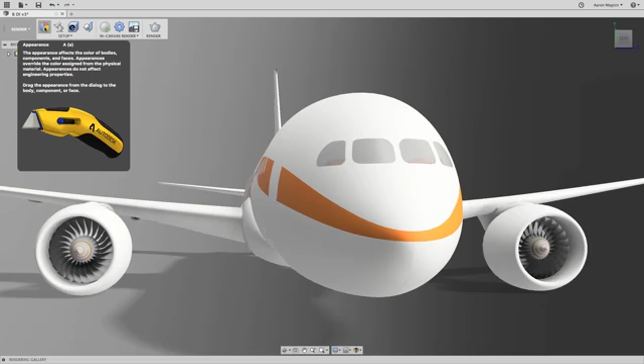So let's go. The first thing you want to do is apply appearances. This includes those materials, finishes, textures, and the like. Hopefully you've already done most or all of this in the modeling environment.

This makes working there much more pleasant, but will also help us skip this step when it comes to rendering. Next up, and where we'll focus most of these efforts, is in the scene settings. Right off the bat, the first thing I want to do here is make it appear that this model is really flying and hasn't just finished a belly landing. So let's lose the ground plane.

After that, I want it to look like it's in clear blue skies. This environment background setting is not doing the trick. We'll change to the environment library tab to see if there's anything else that might work better. We can try different things here like dry lake bed, skylight, and we can even download or add custom environments suitable for this majestic craft.

But for a quick turnaround, I might just use a solid color. And while white is clean, let's see if we can find a nice blue, maybe a grayish blue. Some of you might know an RGB value that aligns to your brand too, so we can always type this in for precision. What we have works pretty well, and the model no longer blends in with the white background we previously had, so that's a win.

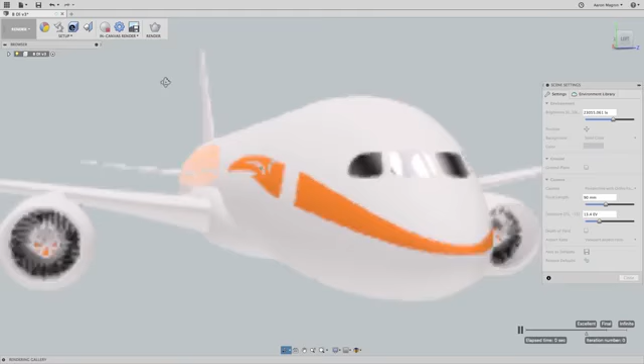As we get closer to something acceptable, we'll start to use our in-canvas rendering tool to get better insight on the changes we're making. As we adjust views or change settings, this will give a clearer indication of what the final rendering might look like.

Note that in the corner you can see the status of the rendering process. And what I also want you to note is that it's going to stop when it reaches excellent quality. This is an in-canvas setting, but it can be set to resume to final quality or to infinitely render if that floats your boat. Just click and drag the small arrow on the bottom to the setting you want.

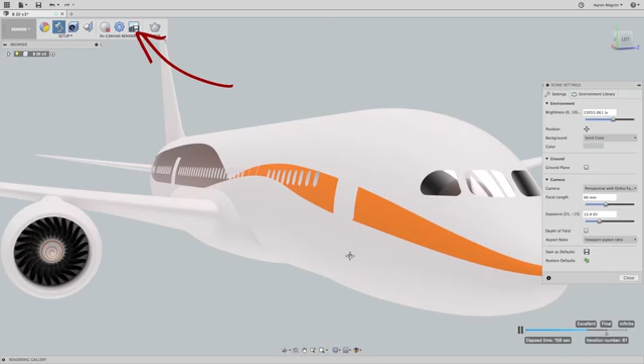If your in-canvas rendering reaches a quality fit for marketing, make sure to save it out using this button. But please beware that any mouse movement causing view changes will wipe all of the hard work and computation time.

This is something we can overcome, however, with the addition of the ability to lock the view found in the in-canvas settings. With that on and while rendering, if I try to change views, I'll get told this. In short, it says no can do.

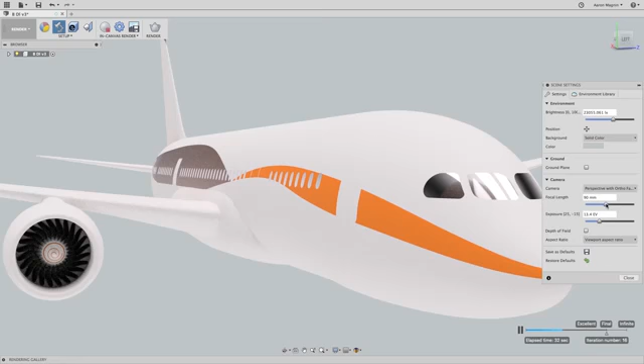Anyway, we'll turn that off and look into a couple more settings that I often use. Focal length is one of those. This emphasizes or minimizes the effects of the perspective view. So it goes from an orthographic to something you might expect with a fisheye lens.

Of course, like most things rendering, this is up to you to determine what's best. Finally, depth of field helps create those images where you might focus on some portion of the model in the fore or background, and blur the rest.

Again, with this, similar to the previous option we were discussing, try different angles, try different focal points, try different blur settings until you dial it in. Then send those renderings to the cloud. Do it locally, or resume the in-canvas render.

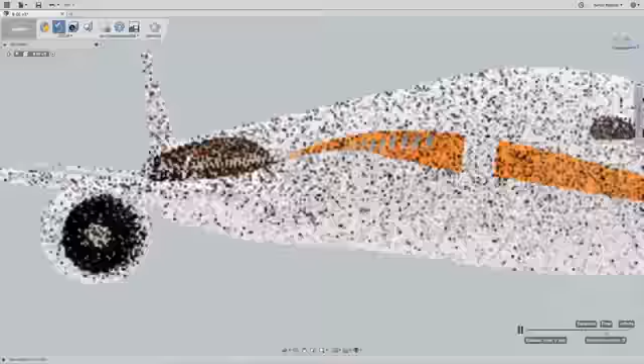For top quality renders, you'll definitely want to address more settings like appearances, textures, custom environments, etc. But for a quick render and a quick tip, this'll do.